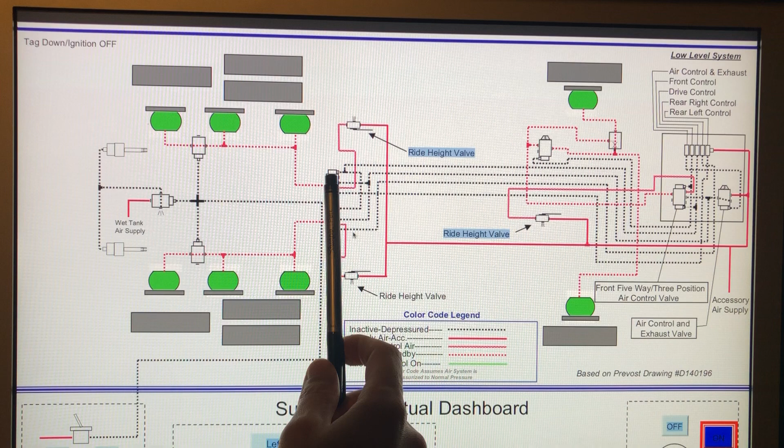So something to understand here is that when we talk about the rear side of the coach, which is where most people have issues, there are essentially four components involved in terms of valves. So there's a 3-position valve for the left side, 3-position valve for the right side, and then there's a 2-position valve for the left side and a 2-position valve for the right side.

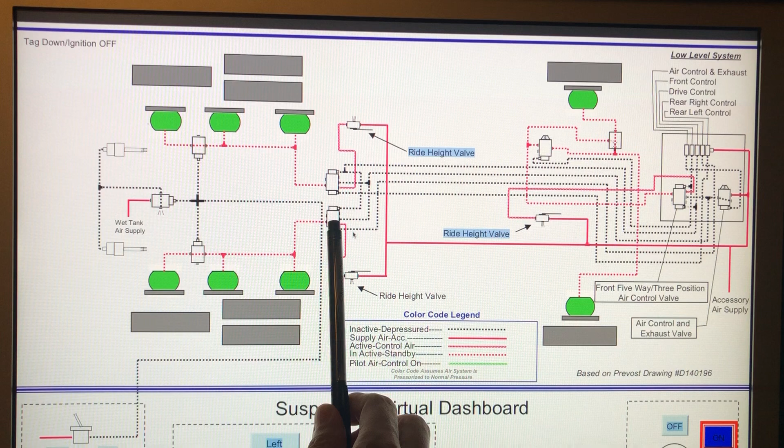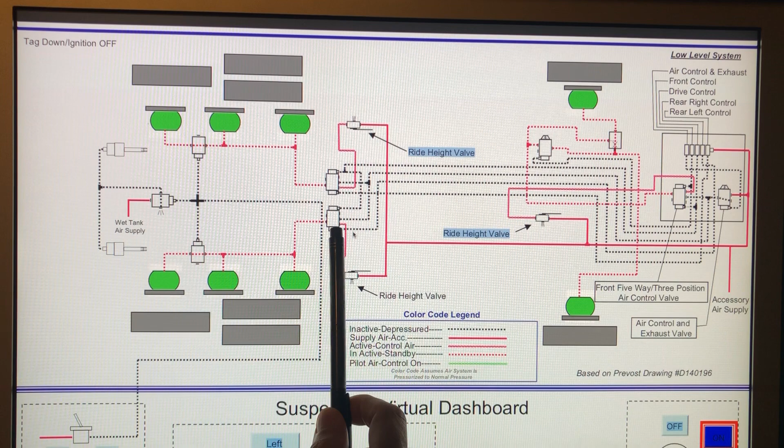Other than that, all these other valves are not anything to do with the leveling of the coach, and so they don't really matter when it comes to tracing down your leaks and figuring out how to keep the air in the airbags. By the way, these are about where they're pictured. So they're in front of the drive axle, and these are mounted on that wall there. If you crawl underneath the coach, you'll know what I'm talking about. But they're pretty easy to get to, especially if you get your coach up on little ramps like I did.

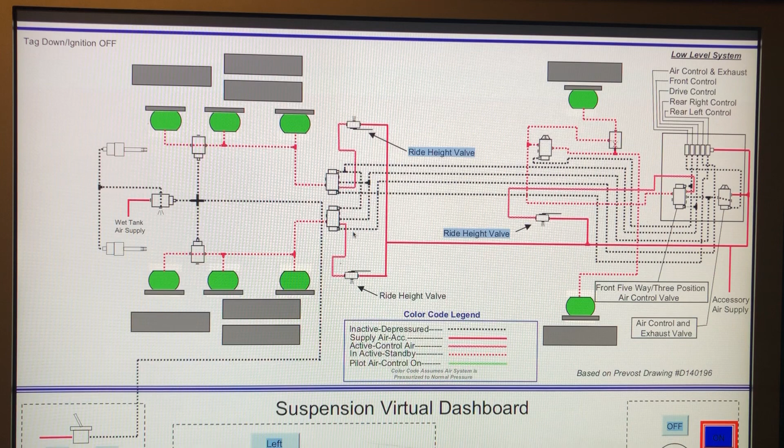And essentially what you want to do is you want to find if there are any leaks from this point and any of the bags, including this 2-position valve here as well. What this 2-position valve does is when you lift your tag, you need to exhaust the air out of these bags so your tag axle can actually go up. And so when you flip your tag switch, it's going to pressurize this line right here, and essentially it'll serve two purposes.

One of them will go to this valve, which activates these brake chambers, which actually do the lifting, but simultaneously it's going to pressurize or engage these valves, which will basically open this rear bag to exhaust the air out of it so it can actually lift the tag. So again, the tag bag is the one that can actually exhaust air out while keeping the air locked into these two drive axle bags.

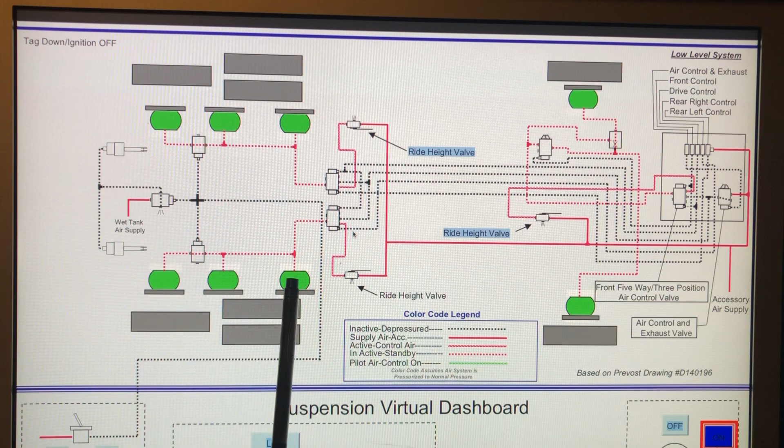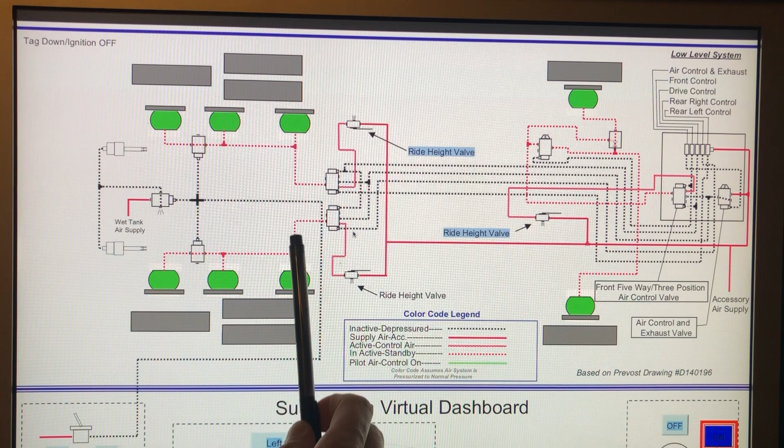So when you have the coach leveled off and you've parked it for the night, if everything works properly, if there are no leaks, then basically the air gets trapped in these lines that are going to the bags, through this valve, and to the tag axle bag. Now, most common leaks are going to be in your fittings, in your connections, and in your valves. So it's usually not the actual airbag itself. The airbag has to get pretty darn old and start cracking in order for it to start leaking air out. So the first place I would check is in this 2-position valve.

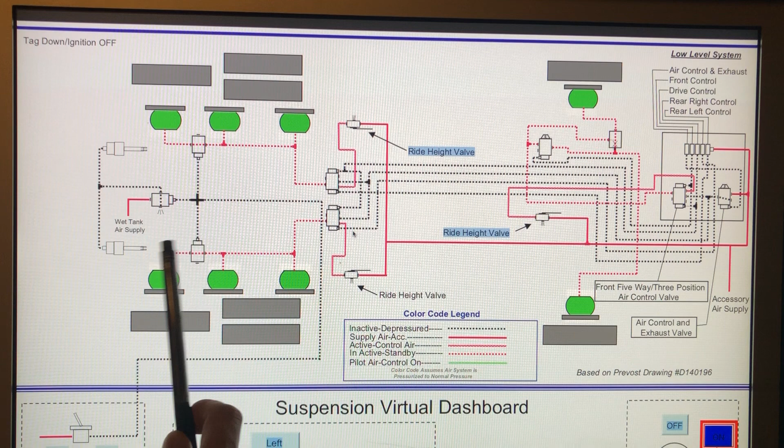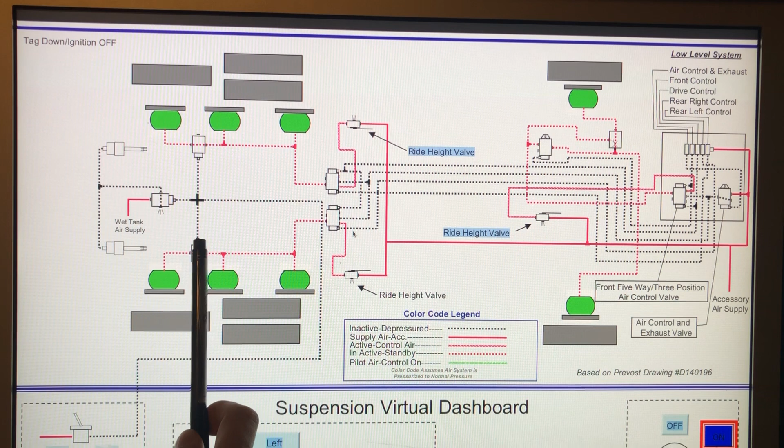And these valves, if there's moisture that makes it into the lines, they'll corrode a little bit, and essentially they won't fully close on the exhaust port, and they can leak a little bit. So what you want to do is spray soap solution on all the connections, especially these two, on this two-way valve, to figure out if the air is leaking out through the valve. Because if it is, depending on where the leak is, it's potentially going to deflate all three bags, or it'll deflate these two, and your tag will be still inflated, but it's not enough to hold the coach up.

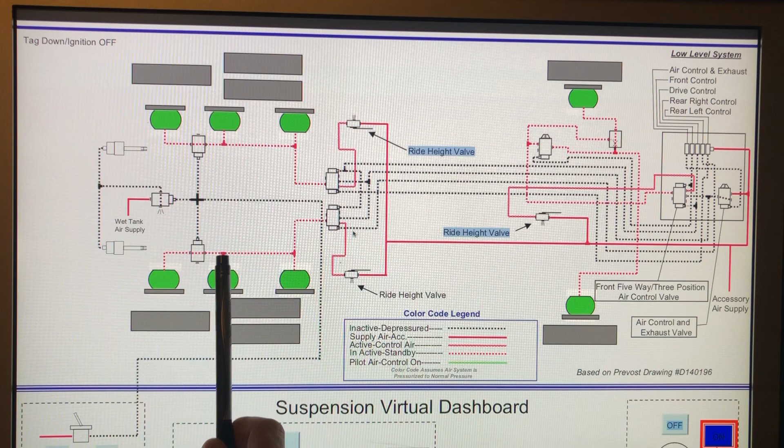So you're going to spray the connection to the tag axle bag. You're going to spray this connection going into this two-way valve. You'll also spray this connection coming out of it. There will be a T connection there. So you essentially want to spray every single connection with this soapy water solution to see if there are any bubbles coming out. And the last point you'll want to spray is this three-position valve, and make sure that it's not leaking.

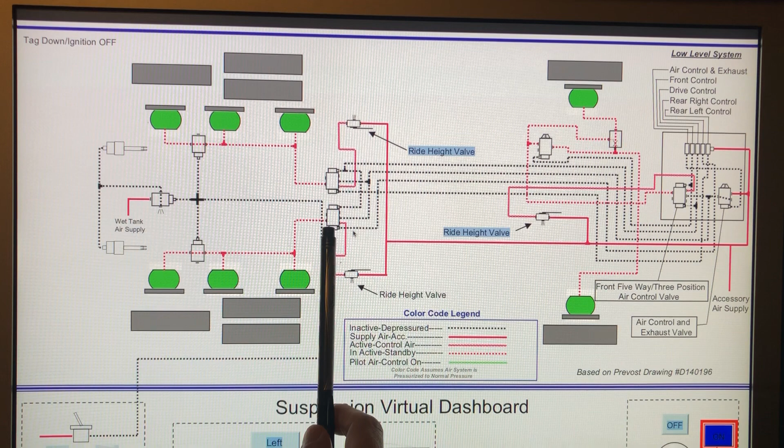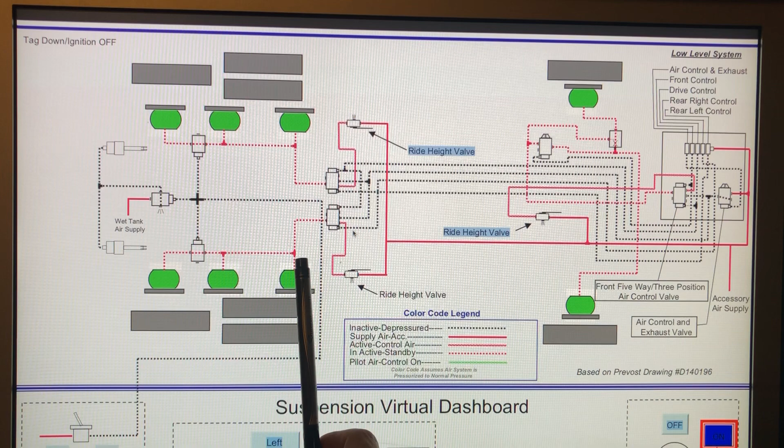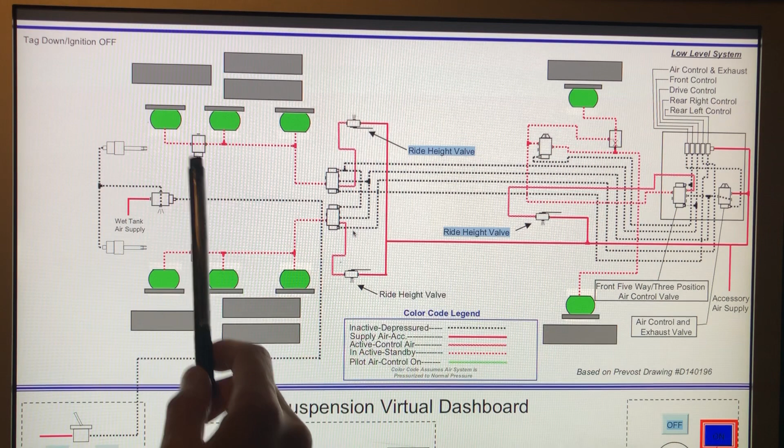But you can still have leak issues if all of these connections are sound and everything's really tight. If your three-position valve internally is leaking, it'll also bleed these bags down. So to really do a true test of no leak, you could disconnect all these lines, and when the bags are fully inflated, which is about 120 psi or so, you could check this valve to see if it's bypassing air out. Normally it shouldn't be, and if I was gonna fight my leaks, I would just replace these just to know that they're good, and I would also replace these two just to know that they're good as well.

And so really, as you can see, it's a pretty simple system. It's not that many connections to check. It's 1, 2, 3, 4, 5, 6, 7, 8, essentially just 8 connections. And you'll be able to figure out where it's leaking along any of these. And what I did on my coach is I also sprayed down the bags as well, just to be sure. But again, it's highly unlikely that the bags will actually be leaking themselves. It's usually the interconnections. So that's essentially it. And you do the same thing for the other side.

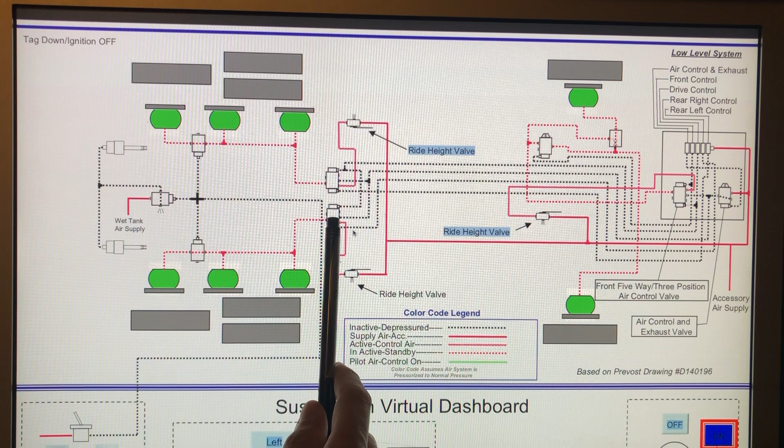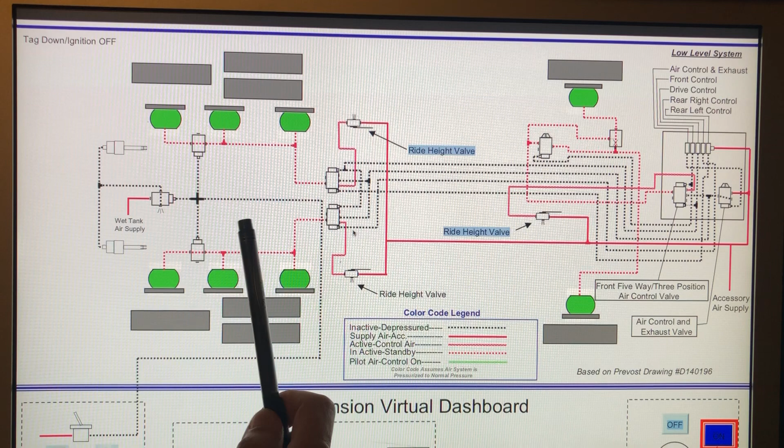This leveling valve here has nothing to do with bleeding off pressure when you're in park mode, because there's a mechanism inside this valve that essentially blocks it off when you don't have the ignition on and you don't have the selector in the drive position. These leveling valves are basically non-functional. So again, you want to make sure that your valve is good, that it's not leaking. And the way to really check that is to just disconnect these 3 lines, and spray soap solution on all the connections and make sure nothing's bubbling. That way it's holding. And then just go through and check all these other connections.

And I'll make another little video to talk about how some of the older coaches out there have this tag lift mechanism that is reversed from how it's pictured here. And so that actually will give you issues. So I'll make another video and I'll explain that.

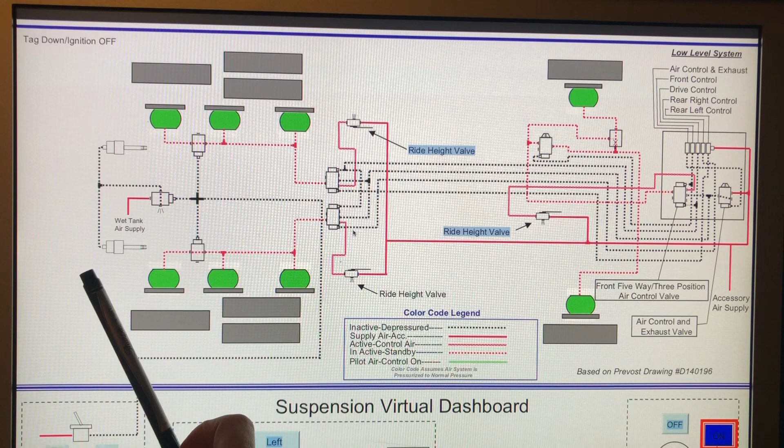So hopefully this was helpful. I'll do another video on the front side just to explain that a little bit more, but this video is focused on how to diagnose leaks in the rear 6 bags. All right.